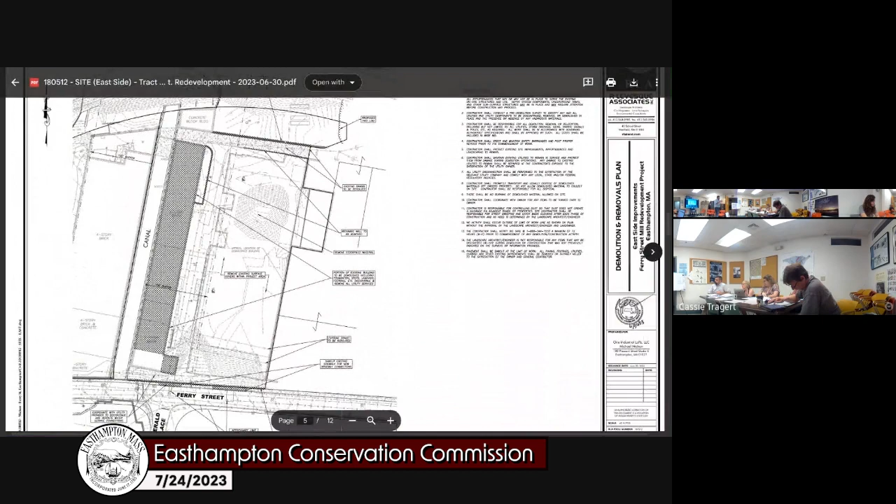So just, right, is this the current proposal or is this the previously approved? So this is the current proposal. So what you're seeing there and up on the screen is the current proposal.

Thank you. Which direction is west on here? West is to the left. East, so here's the canal. The pond is just across the way over here. The roundabout's just on Ferry Street right here.

Under this new proposal, the existing building that's essentially on the canal would be totally demoed in favor of a new building towards the center of the site, essentially eliminating the reuse of that existing building. It's in a dilapidated state that is beyond repair. Is that fair to say, Mike? Correct.

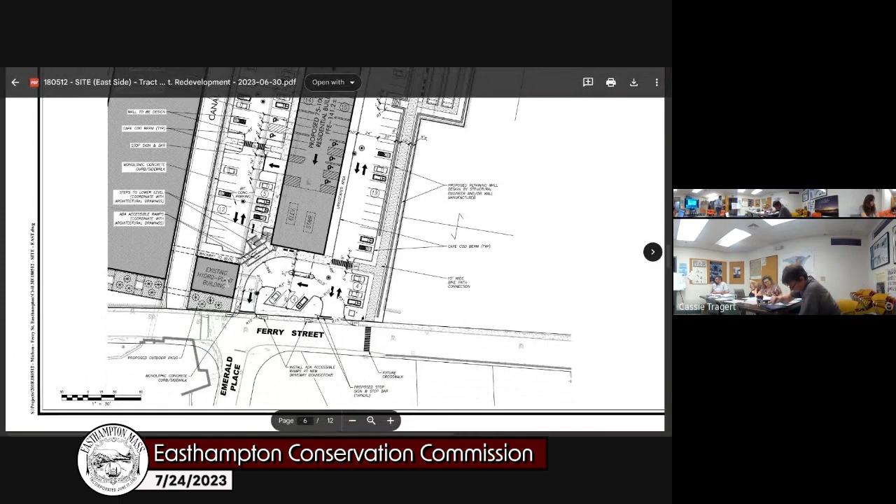What is being proposed under this new jurisdictional area on the property is associated with some buffer zone off the front of the site with a canal, a pond, and the canal itself. And some land subject to flooding. So there's a flood elevation on the property, and that elevation is 122.3, just to be technically accurate.

Part of our submission, we have a couple figures that show that. When the flood study was prepared, those old mill buildings were already existing, so the area of those was excluded from the flood study or didn't count within the floodplain. So what we're proposing is the demolition of those buildings in favor of the new building, and just that swap of building area provides enough compensatory storage within the floodplain, based on the square footage of the buildings at those lower elevations. There are a couple figures in the Notice of Intent application that demonstrate the different areas.

So that whole area to the right of the canal is all flood? Well, just the very lower elevation. Ferry Street is way up high, we're at about elevation 143, 138. So up here, feet of elevation, like 143. Then the flood elevation is down here, essentially down in this corner, at 122.3. So from here to here, there's a pretty significant grade change.

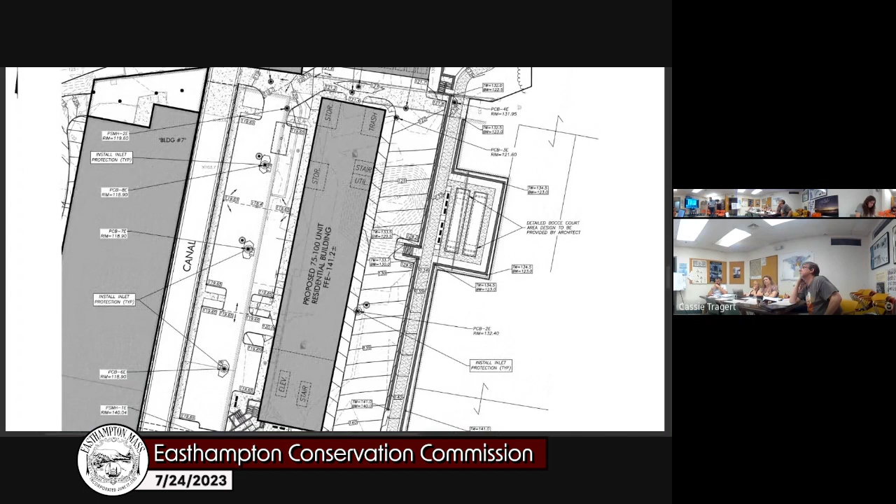I'm Mike Nishan. All we're really doing is the building is the exact same width and length as the building we originally planned to build along the canal. The problem is once we got into this side of the site, it's not accessible on the canal side. We're building against the canal, we have staging going over the top of the roof, and it's going to end up being a nightmare. EMS can't get to that side of the building, and then there's maintenance of the entire building.

So we literally took the footprint from the canal and moved it to the center of the site. And that was enough for the change, but the stormwater calculations are almost neutral.

From a stormwater standpoint, there are several outfalls that go to the canal. What was previously proposed was to reutilize those outfalls, improving the existing conditions with water quality treatment. But there's an overall net reduction in impervious area, so we're improving the water quality prior to discharge. There are various other outfalls from the neighboring property to the east that will be maintained under this scenario. What's coming from our site is essentially what was proposed under the original order of conditions, just modified to accommodate the new plan.

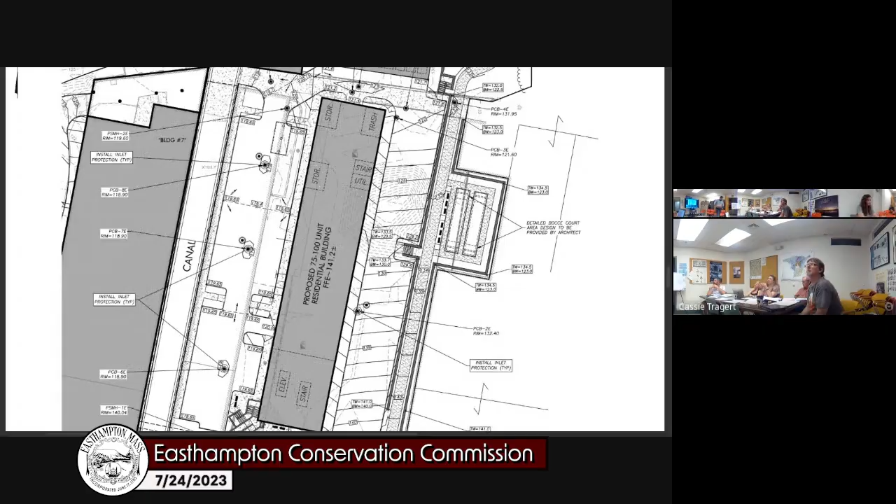I think I was just trying to understand it, and I think you answered it. Was there a change in impervious area? Before there was going to be parking to the right of the current building, correct? I brought a copy of the original plan as well.

This kind of just shows the term. Essentially, the building was over here where this parking is, and it was just a flip-flop. So the building goes to the middle, and the parking goes to the side.

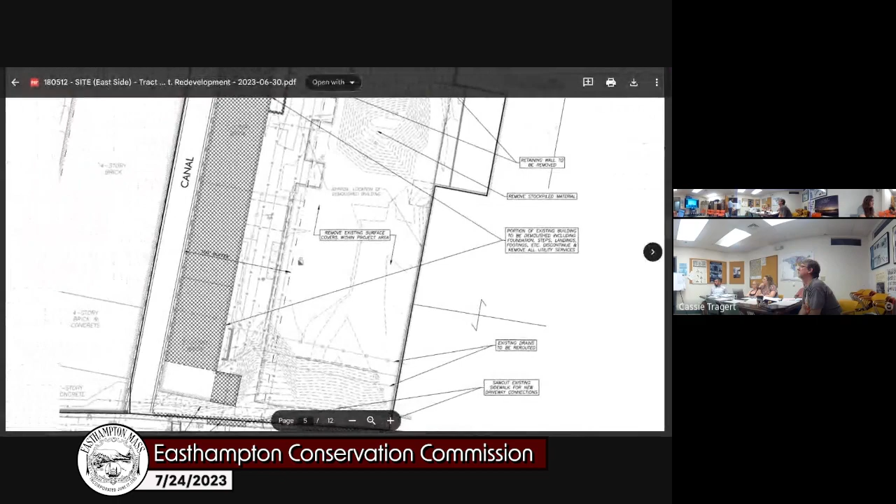And this side is an access road? Yes, so you'll have a main drive aisle that comes down around. And that was proposed before, right? Yeah, it's pretty similar. You drove down, the ramp was still there because you have to get down to that lower elevation, except you came into the middle versus to the outside.

Yeah, I was on the site visit, it is a pretty big drop. Yeah, it's a very big drop once you're out there. Where was the runoff going? Generally the shape of the site is that everything kind of slopes down towards the canal, towards the back of the property and the canal.

I think it might be helpful if I share the images from the site visit so the commissioners can get a better idea what we're working with here. This site visit was conducted on July 12th, 2023. Hopefully, I think I've got to reshare my screen. Hold on.

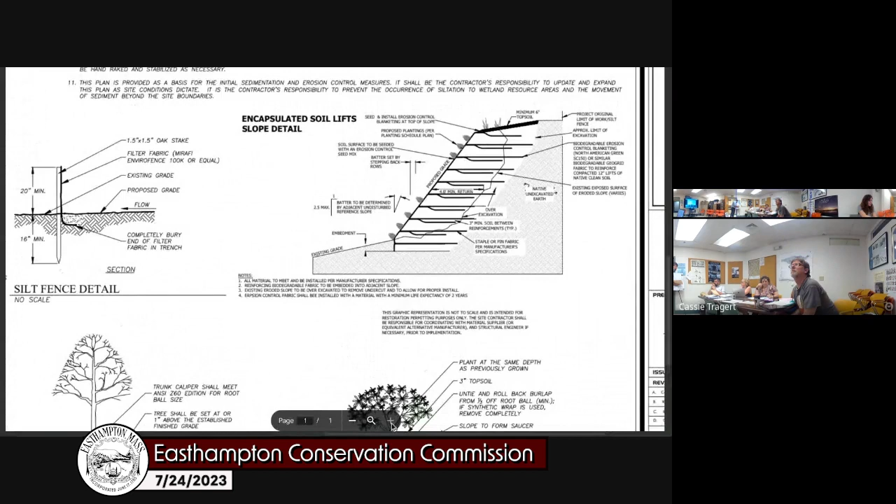There was a request to provide the expected life expectancy of the erosion matting that would create the lift. We've updated the note to specify North American Green SC150, or it'll be SC150BN, which both have a 24-month life expectancy before it biodegrades.

Next note was to increase the proposed soil lift from 6 to 12 inches, which is in the same note, and then remove the pine bark mulch from the planting details - so we replaced the mulch with 3 inches of topsoil adjacent to those plantings. So those comments have been incorporated, and I think we're here to just agree that the comments have been incorporated into the plan, and hopefully come up with a final stabilization of that slope so we can get that started.

I can add to the commission that at the end of the last meeting, the commission said if we were able to get this beforehand, then I could confirm that all those things were on there.

But basically it was submitted pretty close to before the meeting, so I was like, well, I might as well come and explain it here to y'all. So, Deb, did you have a question?

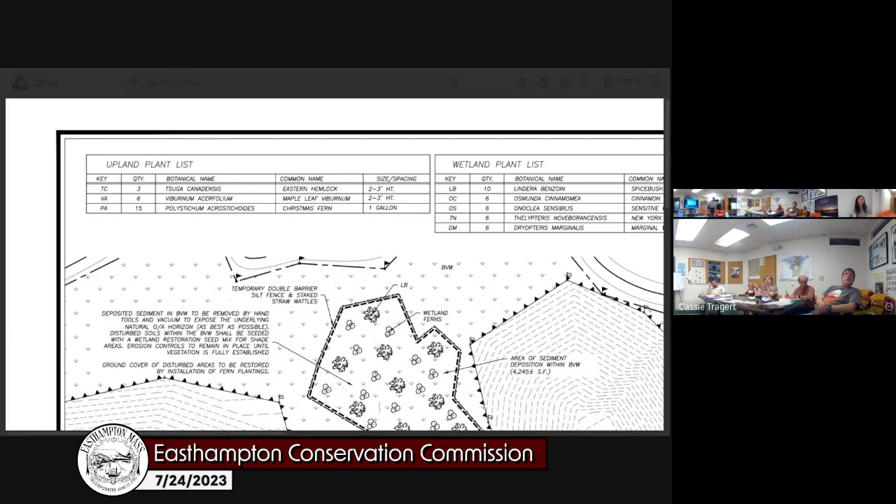The next meeting is August 14th, so try to plan to have the planting information and supplemental information, justifying that they're native and why they'll work here, and why they work as live stakes generally, summarized in an email. We just approved it for the slope, but we're still going to talk about the in-stream work next.

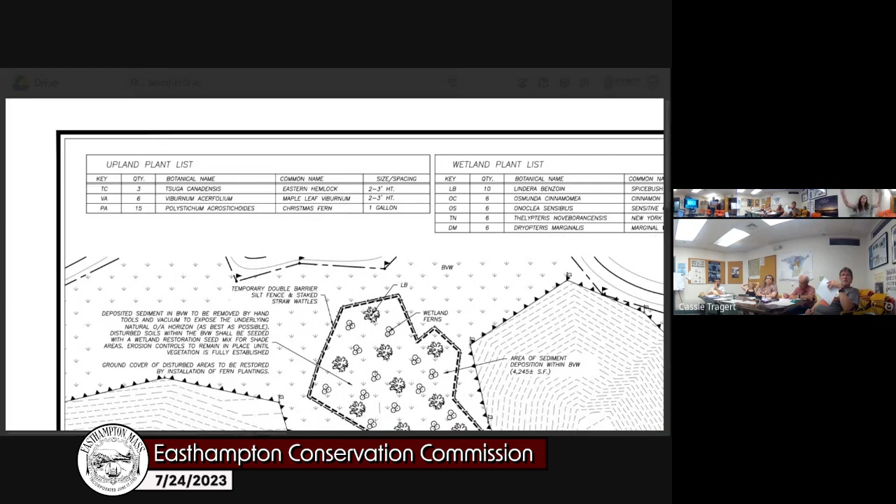Okay, so an overview about the in-stream stuff. Let me stop sharing this.

The new piece of information: last meeting we talked about how the chair and I met with Scott Jackson, a professor at UMass Amherst particularly knowledgeable about wetlands and impacts to wetlands. He explained that even if sediment went into the stream, the best course of action is to allow the stream to self-heal and not conduct any work or action to try to remove that sediment, because that would be more damaging than helpful.

He talked about what you could do instead, and explained how it would be hard to set a standard to determine the impact of that sedimentation on the population, wildlife habitat, and water quality, because we don't necessarily have baseline data to compare it to. So it wouldn't be clear if we were making them change things based on what happened or based on just how it was before. He cautioned about making changes in relation to that.

He suggested the commission could ask for an assessment of the overall health of the stream, or an assessment of what could be done to improve it. Then it's up to the commission whether to require them to execute one of the actions determined through that assessment, or maybe just do an evaluation of the invasives on site and an invasive removal, similar to what happened for Tasty Top in terms of keeping that crossing for a time — the commission required invasive work to offset that remaining. The last new piece is to take a look at the area.

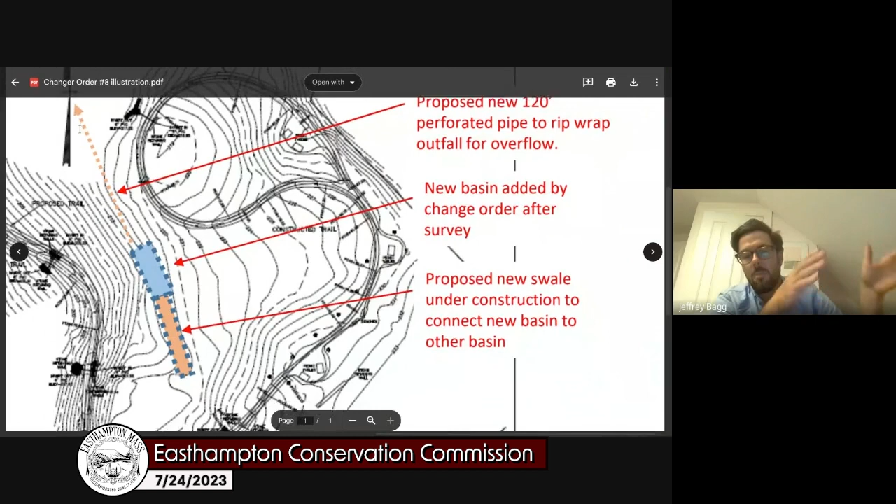So the area in blue was the basin that was created in the field as a construction change. The line going up the screen would be an approximately 120-foot perforated pipe, mostly underground, daylighting on the side of the site, which is basically a restored habitat meadow. That would be an overflow area where the pipe would daylight, with riprap in that vicinity, similar to other areas designed for drainage. So that was one option.

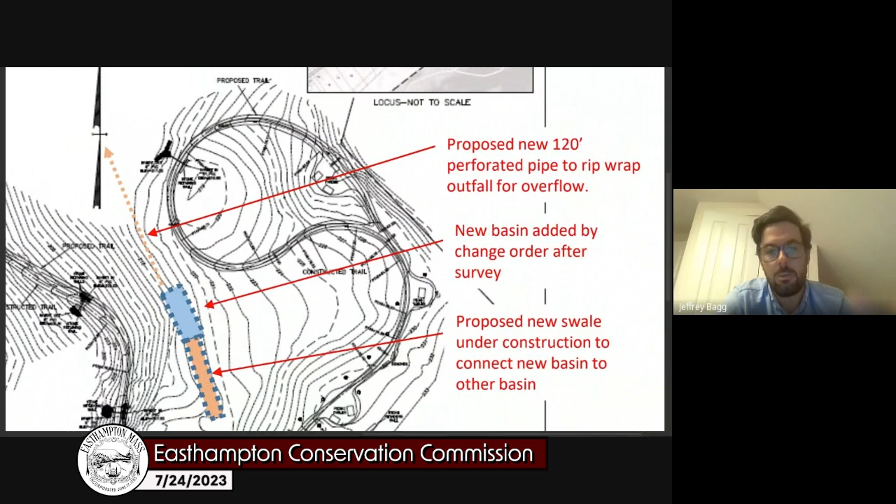And then recently the designer recommended, at the bottom of the page, the proposed new swale. When we were out there, you could see the topography. The orange would be this new swale that would get constructed. It's pretty small, probably 4 feet wide by 80 or 90 feet, just to connect the blue basin that was constructed to that area. You can see the contour lines kind of flatten out, they're really wide—it was a basin that got constructed.

So the designer recommended that if we allow some of the water to flow to that basin, some will go to the basin in blue. And if there's an overflow or a larger rain event, the overflow would then go out to the other side of the property. So in the grand scheme of things, it's a pretty minor change.

But I realized, as I was authorizing the contractor to do this, that the permit says you should see it before we do that. So I was trying to catch up and get to you guys tonight to show you this.

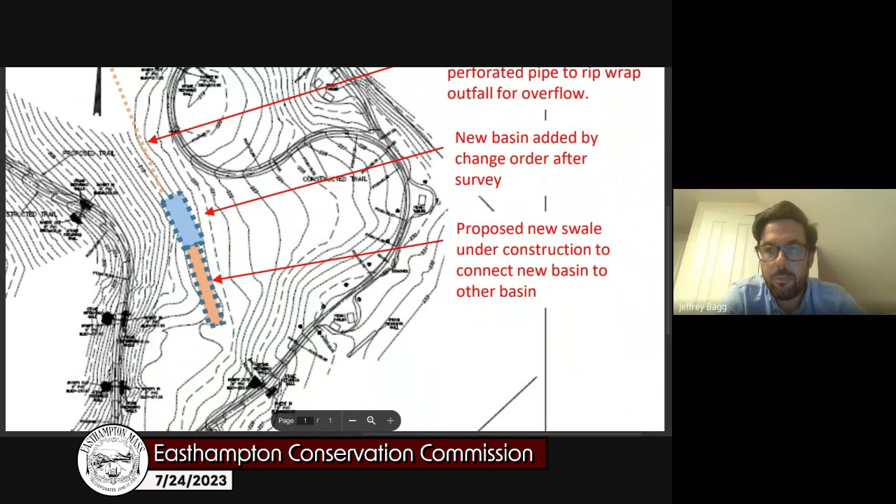Just to add, as a reminder, this project is a stormwater permit only project—the Conservation Commission only issued a stormwater permit. There's no jurisdictional areas under the Wetlands Protection Act here, and there's no wetland areas here.

This is proposed as a fix because when this crazy rain event happened, it caused the trail to wash out. It had been holding up pretty well for some pretty good rain events to this point, but this big rain event was just too much for that basin. It just travels right over the edge and causes things to wear away, and then all kinds of stuff to happen. I have pictures I can show you guys too, to get a better idea, but that's where it's at.

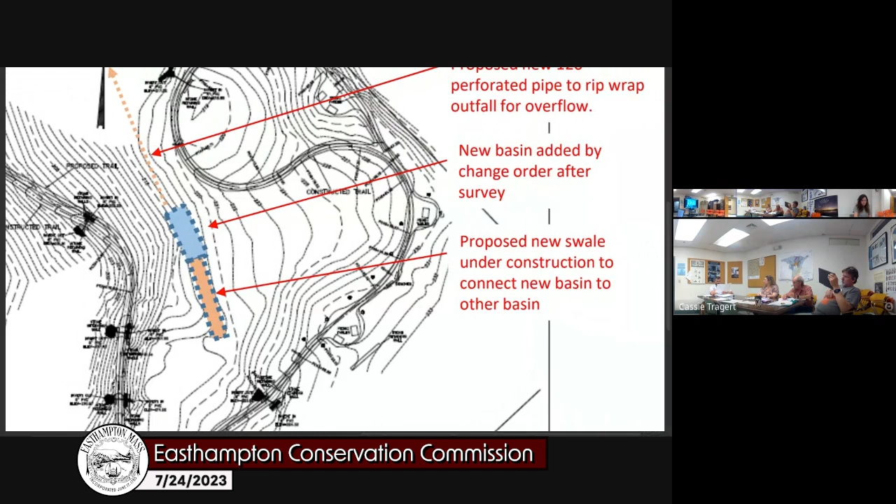So why was that basin added? Just to help us catch up here—the project didn't really add much impervious cover anywhere, and it didn't really change much. I'm wondering why the basin was added, in the context of a relatively minimal project that occurred. The first blue area, that's existing.

My understanding of why it was added was to try to avoid this problem in the beginning. It kind of helped, but it seemed like it wasn't enough for these really big rain events, because there was already erosion happening, with water traveling down and along the trail, causing it to wash away. So they tried to stop that from happening—I guess that was why it was added. But it's not enough. I don't know, Jeff, does that make sense?

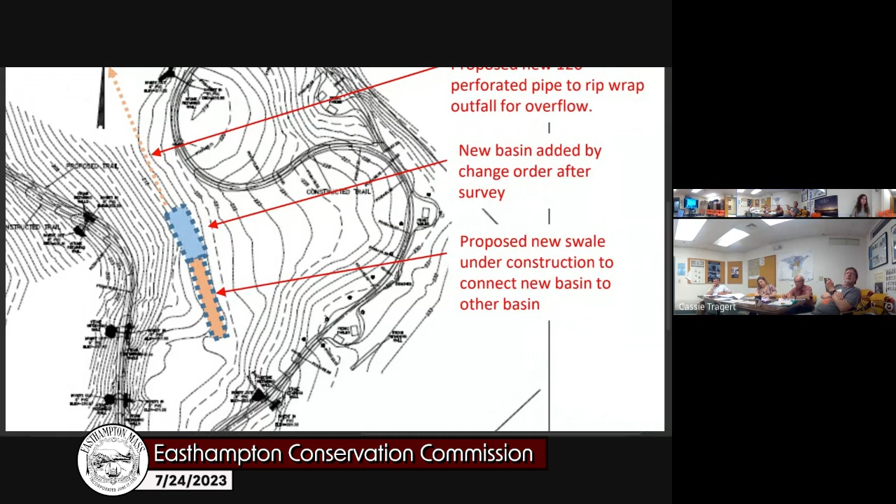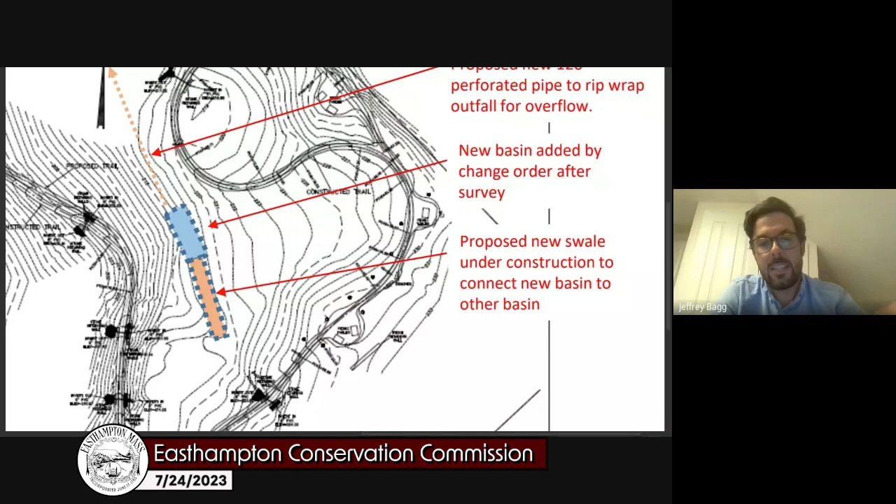Yeah, no, it does. I think we found ourselves in a situation where the designer said it was going to be designed one way, and the contractor said they built it to that design. When we brought them out there, they didn't agree—the topography didn't match up, but the contractor said they built to what the plan said. So that basin at the bottom of the page is just the big bulge in those lines that did get constructed, but the water doesn't currently get there. It's shifted over slightly to where the blue basin was built.

And I think if Cassie has some pictures, it's worth showing. That's a field, planted in the wildflower meadow mix, and that's fine. But right at the back of that blue basin is a wood line, and it goes down a hill—you can see the topography lines, it shoots downhill. What's happened is it overtopped once or twice and created a channel going down that hill. We're not talking about impacting a resource area in this case, I want to say that again.

We're just talking about how it's cresting that hill, and you can see the trail on the left side of the page. It's getting to that other channel, and the water is in a larger quantity than it should be going down there, and it's been washing out the trail. So we're just trying to reduce the amount of water that hits that crest.

I submitted pictures of the trail impact, but I think Cassie has pictures of the meadow on the site, which may help. Do you have a picture of the basin? Yep, I have it also.

Where was that area where it's wide and flat in the topography? Was supposed to be. Where is that? Oh, I just took it down, but I can share it again. Is it to the south? Yeah, hold on, let me pull it up.

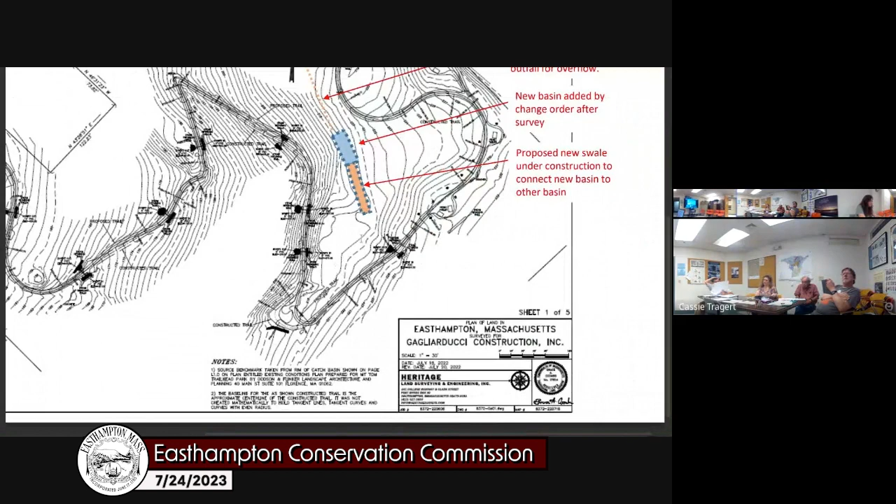I guess I don't know what I'm getting at, but what I'm concerned a little bit about is looking at the parcels, the private parcel along East Street to the west, and not knowing what the topography was. I'm concerned about water going down that slope towards those residences primarily. We've had a lot of issues in the past, though it was a long time ago.

Jay and I were probably the only people on the commission at the time when we had a lot of residents along East Street with water issues, and they were all pointing fingers at each other about gutter downspouts and everything.

We can show at some point the other plan, the design plan. I'd emphasize that it's an overflow pipe, so we're not proposing to pipe all the water out there. Just when that basin is full, that overflow would go in that direction.

I was just looking at that map. It's at least 150 feet of vegetated area to absorb that water. So neither the designer or the contractor seemed concerned with that amount of water getting in, it's a giant meadow which would absorb that additional water.

And I'll show the pictures, hopefully that'll be helpful. I'm just making a note here. Which way does the slope go? I'm looking where the arrowhead is by the north arrow. Which way does the slope go down in that direction?

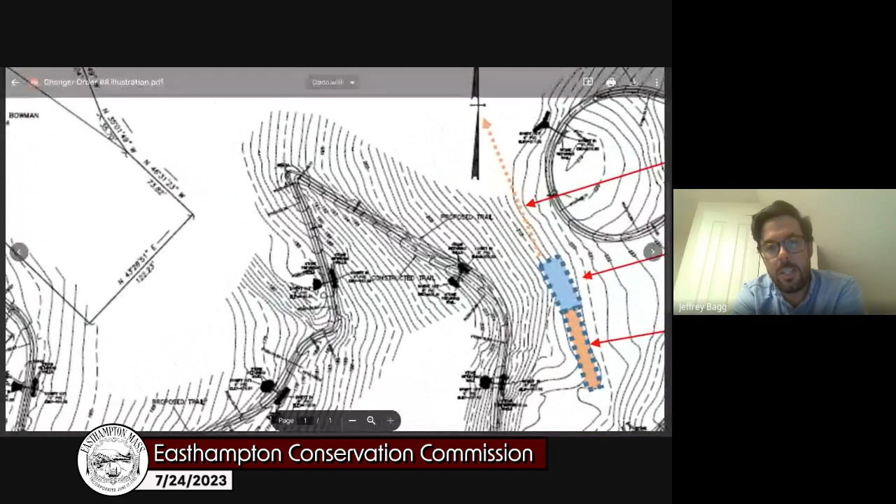So on that map there, Cassie, where you can see the trail loops in a circle, there's a basin, and then the pipe goes under the trail and daylights. It's that black area on the drawing there, and that's that riprap catchment area. We'd be looking to replicate that. I don't know the exact location where the contractor wants to daylight the perforated pipe, so these are all pieces of information I can try to gather.

I'm stuck between trying to get the approval and trying to give the contractor time to get out there. We'll have to come back in for the COC at the end of this to show the commission the final changes. So for a stormwater permit, the project wouldn't get a certificate of compliance, but the commission would issue a memorandum, like we did for the animal hospital recently, saying that it was done essentially.

That blue area says 'basin' - what does that mean? It's there, that's that kind of riprap area I was showing in the pictures. It's there right now. That blue section exists.

What overflowed? So kind of what I was trying to show from the pictures is that - where on the map? I don't know if you can see my cursor, you probably can't, but at the edge of the basin, and then it travels down to where you can see all the lines get wicked close - that's where it goes down. So the new basin overflow? Exactly, can't make it bigger.

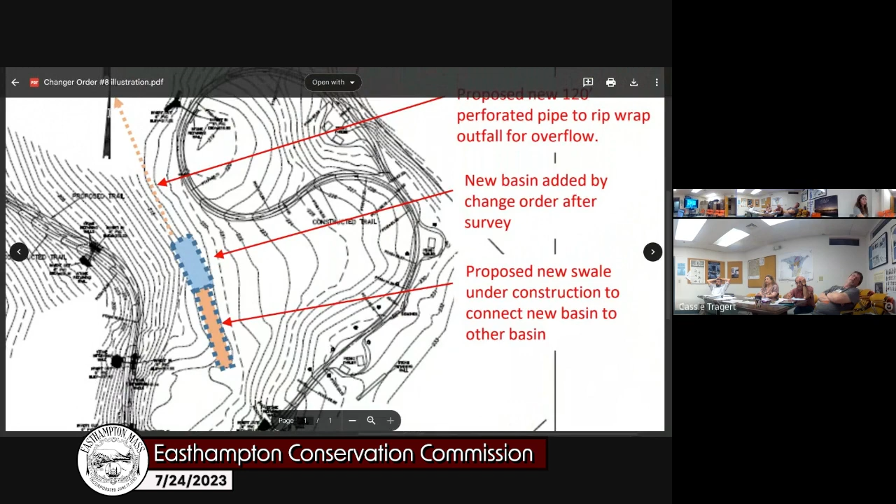So that's kind of what they're asking you to do - essentially you add a swale to direct it to this area to the south, but then also add a perforated pipe to direct it over here, and then it would land in another riprap basin, or not like a basin but like an outfall, to try to disperse it around, and then it would travel down the rest of the vegetated meadow area. Well, that's what they proposed to do.

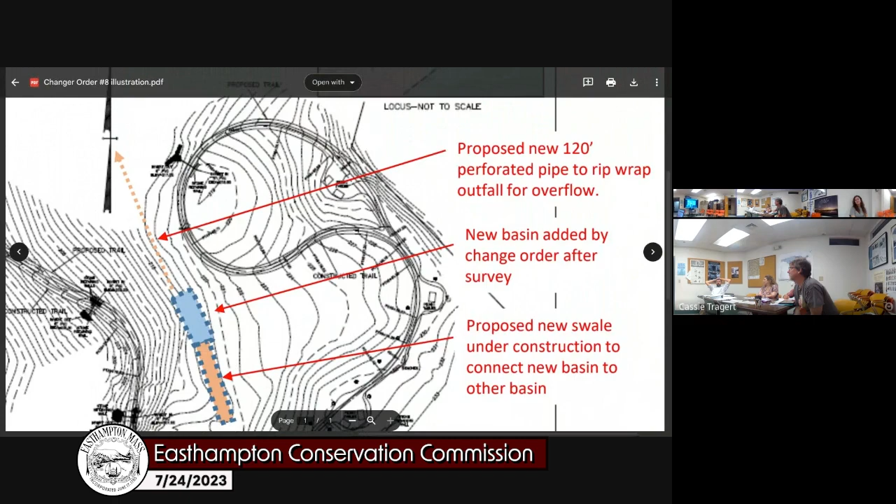I'm just wondering where all the water's coming from, and how did the project interrupt it, you know? I don't think the project is generating all of this new stormwater that's ending up in this basin. I'm thinking the basin's just interrupting some kind of flowage that was happening, and it's coming down and getting on the trail.

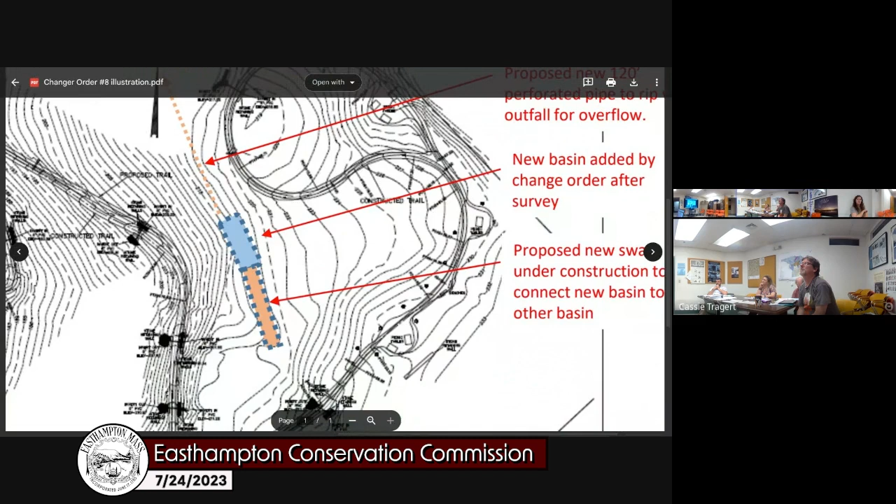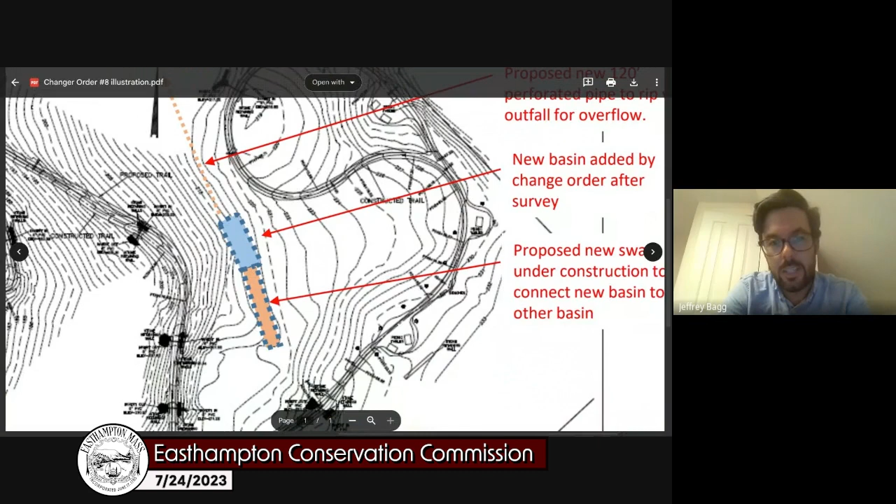Yeah, the designer thought - so on this picture here, on the right of the map, there's the little loop, and if you could read it, it says there's a kiosk. I don't know if you've been up there, but there's a kiosk and a picnic table, that little bulb out to the right. Yeah, right there.

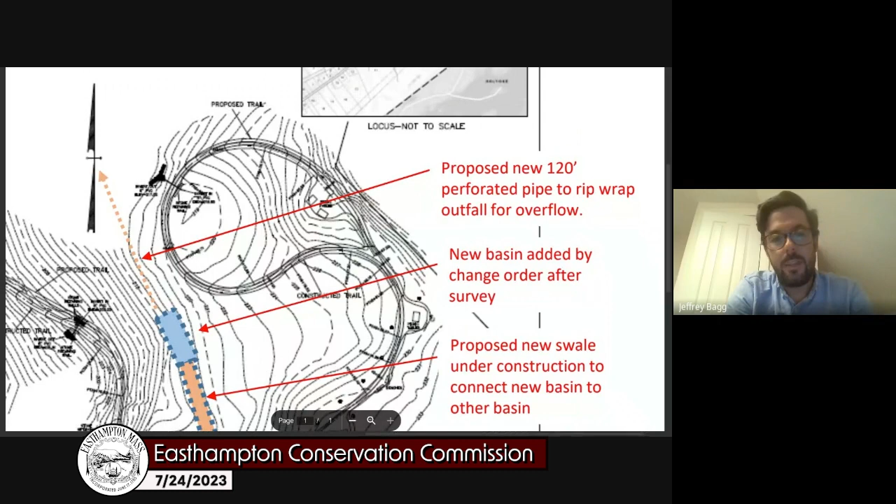What's been observed is that during the last storm, one of the Parks and Rec Department people went there, and it was coming off of Mount Tom. Right behind this is the Eversource access strip, and above that is the actual Mount Tom State Reservation. What they saw was more sheet flow coming from there, crossing over. Then in the wildflower meadow, the designer thought the soil had been pretty well compacted during construction, and that even though there is vegetation in that area, it's still relatively compacted, and the sheet flow was coming at a higher rate than they anticipated from upland.

Is that higher elevation to the right of the basin? Yeah, to the right, everything is kind of increasing up and then going up Mount Tom and all that.

What's preventing the trails above the basin from washing out? Haven't experienced it up there. I don't know if it's just the stormwater, or the way it's been graded and designed is functioning correctly in those areas. Where do we think the directional water is coming from?

From where? So that's kind of what Jeff was trying to describe, this bump out here in the trail. Right, the maintenance folks from the Parks and Rec Department were able to observe what seems like sheet flow happening from this area, and then down, it kind of keeps going down towards the basin.

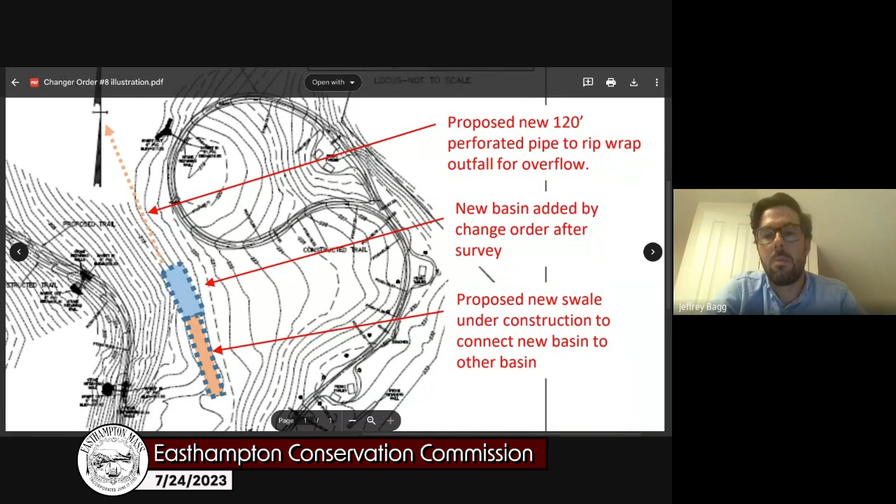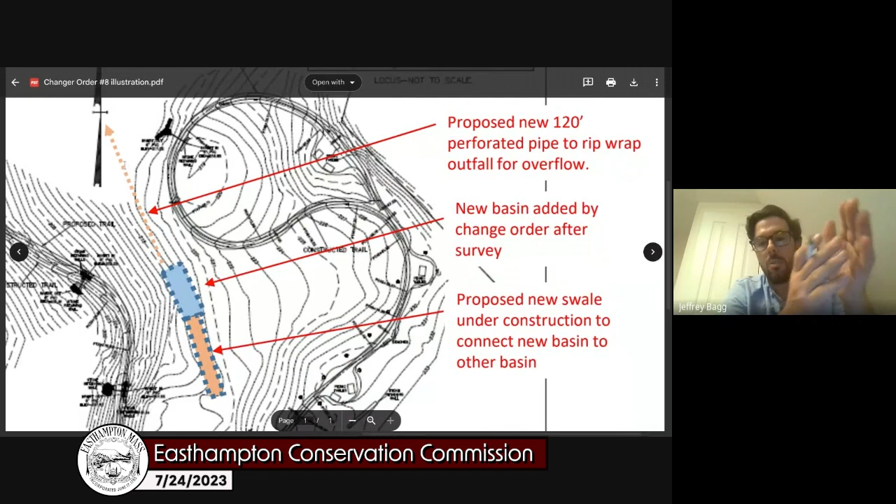But if you look at the orange dash line going up, you can see where it says proposed trail, the contours go towards the trail. They were going to bring the pipe far enough out so the contours orient towards the trail and down the meadow. Once we get to the meadow itself, the site is evenly flat across, and that was the intended place to exit the pipe and do the level spreader, if that's helpful.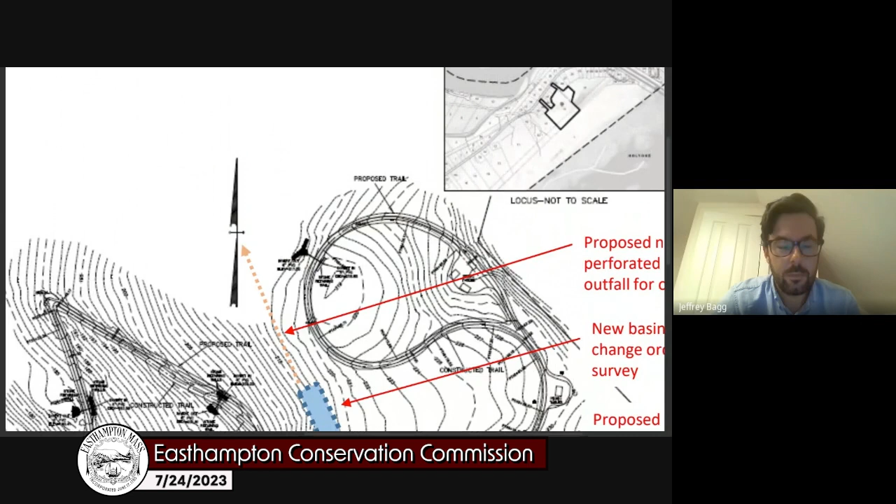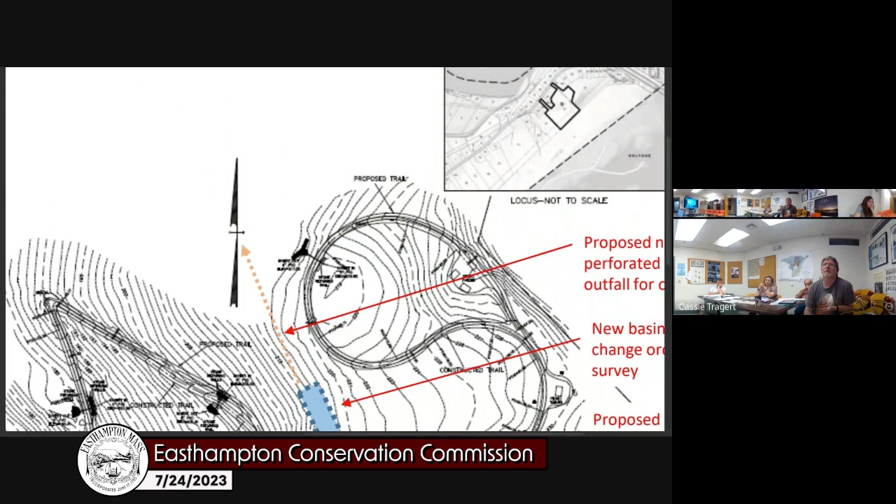It says the proposed swale connects two basins. Sure, where do you see that? The orange, yes, so it connects the new basin to the other basin. This area to the south of that orange rectangle is where they graded it intentionally as part of the original design to let water accumulate there, but due to the final grading, that's not happening.

So what they're proposing is two-pronged: add this orange swale to try to direct it where it was supposed to go, but also add this perforated pipe to try to catch the excess and go down the other way too, kind of making it both go away. I was wondering where the other basin was. Oh sure, yeah, right there, it's just that flat area that the topography lines make clear.

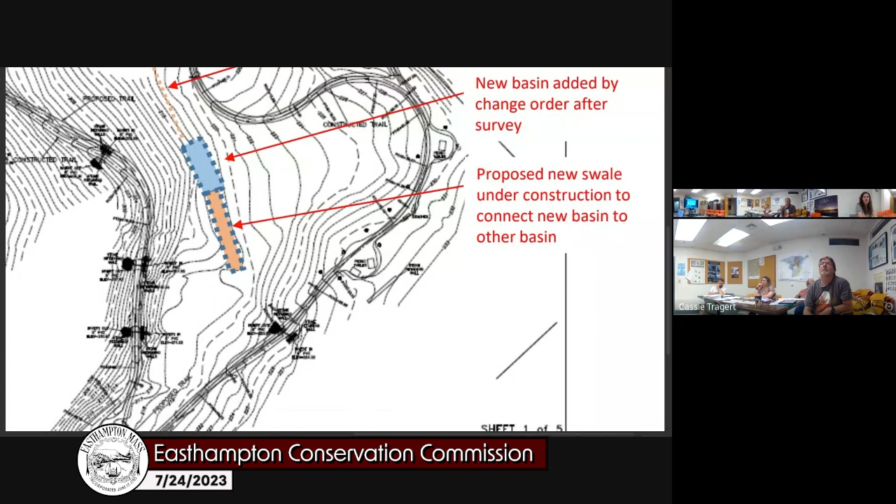And so that wildflower meadow is in that big void with no contours in it. Yes, where they're discharging. There's pretty much wildflower meadow throughout the entire area, but this big area I was talking about is all vegetated with grasses and wildflowers. The area that feeds into this is similarly so, and that's essentially the makeup of the area where the perforated pipe would outlet to as well.

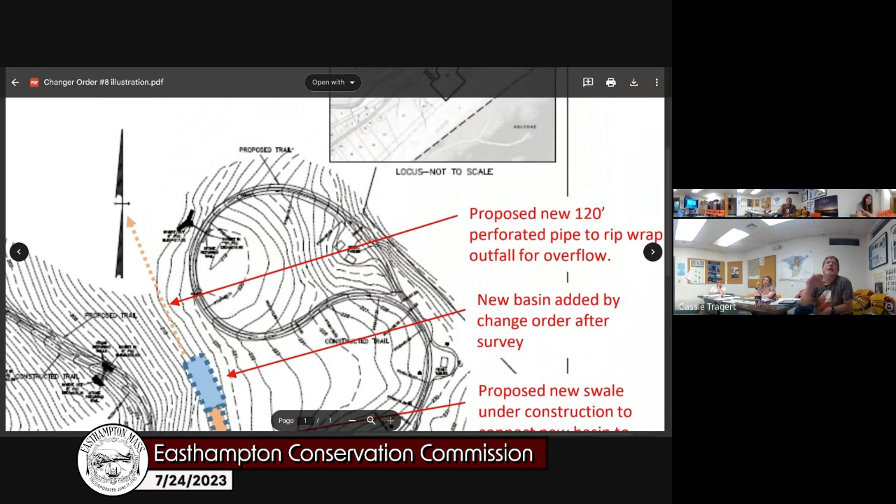That continues to go downhill? Meadow, it's all flat. No, it goes downhill. You can see how these contour lines are, and if you imagine they curve out and then straighten out, so it becomes this kind of flat, straight meadow that extends down towards East Street, essentially.

Maybe it'd be helpful if I pulled up MassMapper, the aerial imagery. No, I can see it now. I can see to the left. Yeah, go to East Street.

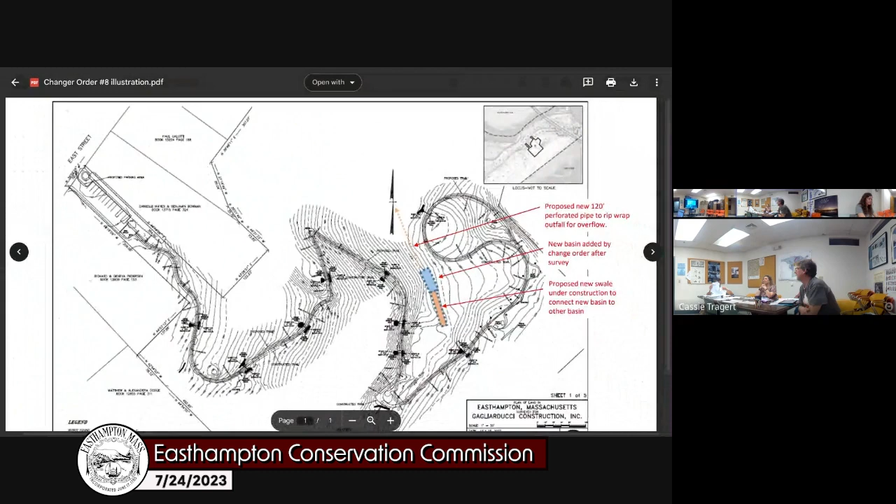Then there's no concern with the flooding heading for East Street with that pipe? I don't know, I have concerns, I guess. Well, it looks like a big meadow then.

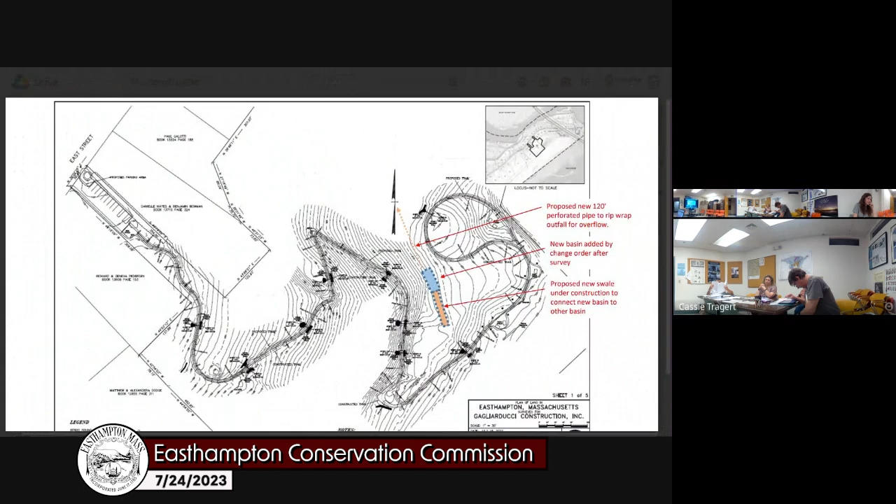Jeff, did you say it was roughly 150 feet from the pipe to where, or what was it? That's a good question, that's a detail I can certainly get. What I was looking at was the rear of those property lines shown on the East Street properties - the first one was like 70 feet, 30 feet, and another 80 feet. And we're going to be even higher than that. So I was just throwing out a number.

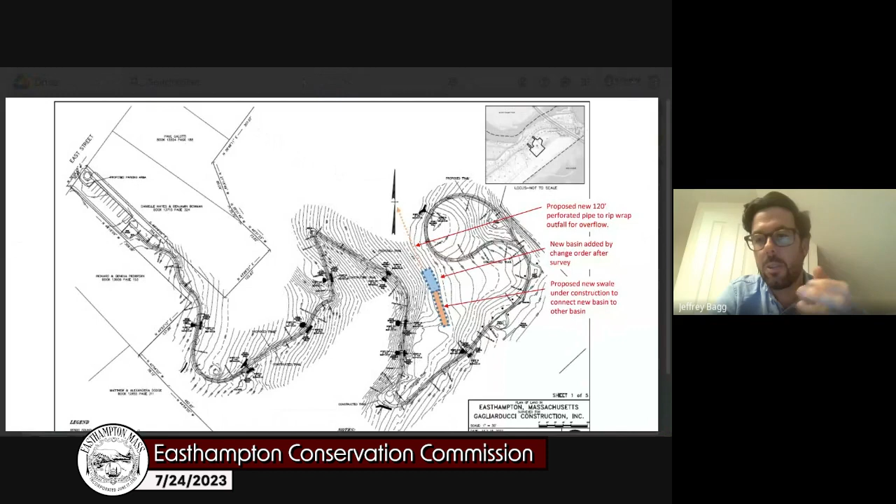The other thing I have to say - I'm going to need to excuse myself in a couple minutes to put my kids to bed. But there was another plan set that Cassie sent me today, the initially submitted plans, which probably show the full contours, because this was the as-built I was trying to display from the contractor. Maybe that'll answer a couple questions - at least the rest of that topography should be shown on another map.

Okay, yeah, I just found it here. So these plans do show pretty flat across the meadow. Not flat - I mean it's steeply sloped uphill to downhill, but there's really no drainage features on it, it's pretty even slope I guess. Right, kind of laterally, it starts to go evenly across that side of the property.

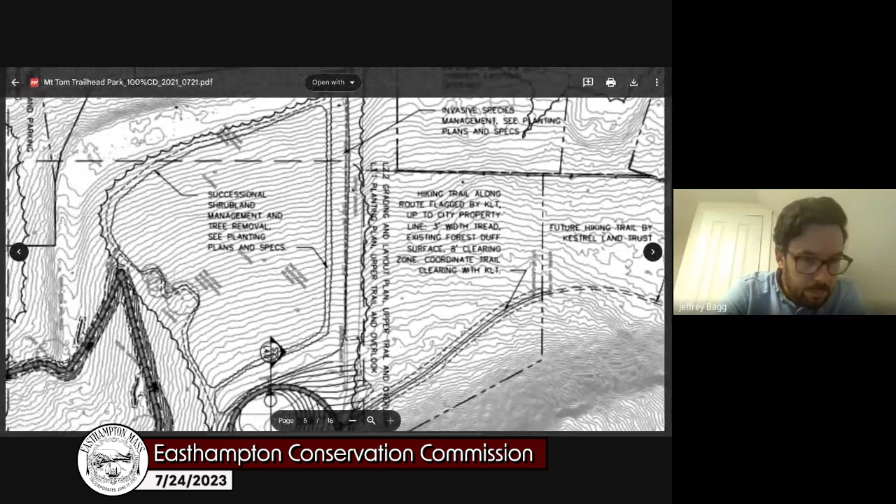This kind of zooms in on that area, you can see where the switchback is in the loop. So it looks like the original design had infiltration trenches on the inside of the loop, not those culverts going across with the level spreaders - is that right? That one is an infiltration basin that does have a culvert going across. You can see it just barely on that map, it goes under the trail and daylights on the other side, and that exits onto the meadow.

Then that has functioned really well. Yeah, my understanding is all those little culverts were part of the original design, that wasn't a new feature. And actually in this one you can see the basin that was constructed right near the label for S1.

But the water is not currently getting there, or not enough water is getting there. So Dan, would one of the questions be some kind of volume and capacity? I had a note that might be one question. The other question is whether the entire length of that pipe would be perforated. And then just where does the pipe daylight with respect to the rest of that topography on the hill? Is any of that useful information? Definitely, okay.

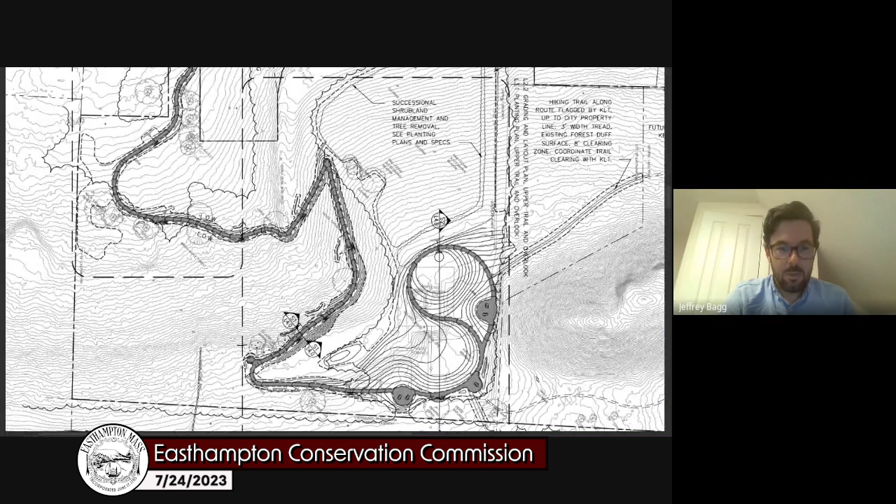Okay, are we able to work through the rest of this? I'm gonna try to, honestly. I think I can, because basically what's left is we need to go back to agenda item 6C. I'll go pretty quick since only a few items have substantive pieces. No, we don't have to make a motion, we just return to agenda order - or you guys can motion to end the meeting if you like, but I wouldn't recommend it.

So, 476 East Street - the update is I don't have one except that I need to do the site visit I wanted to do today, but got swamped with other stuff. I'll try to do the site visit this week and have information ready for the commission. I'd lost the thread on what's required - there was a series of plantings required, and monitoring of those plantings surviving for 3 years, which is what the commission landed on from the enforcement order. This is the trees along East Street. It's item 6C, GNF for Fortalice, 476 East Street, map 158, lot 9, enforcement order 2022-002. So more to come, but it's on the radar, and I'm sorry I dropped the thread on that one - we'll be doing site visits soon and I'll let you all know.